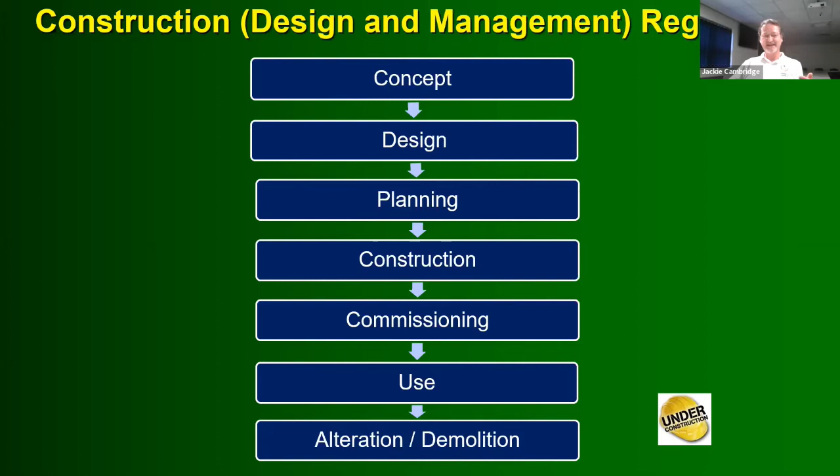There's reasons for why we have it, and I'll come back to that in a moment. Construction design management regulations exist because the construction industry has one of the worst safety records. Over the years, huge strides have been made to make it safer. These regulations talk about health and safety at all these different parts of the project, taking safety into account during the design, the planning, the construction, and the commissioning of the building.

So, just what is construction work? It does cover a wide area - decorating, renovation, and the funny one - demolition. That's the funny thing about construction, we think of it as building. Well, it is normally, but actually within the definition of construction work, it does include dismantling and demolition as well.

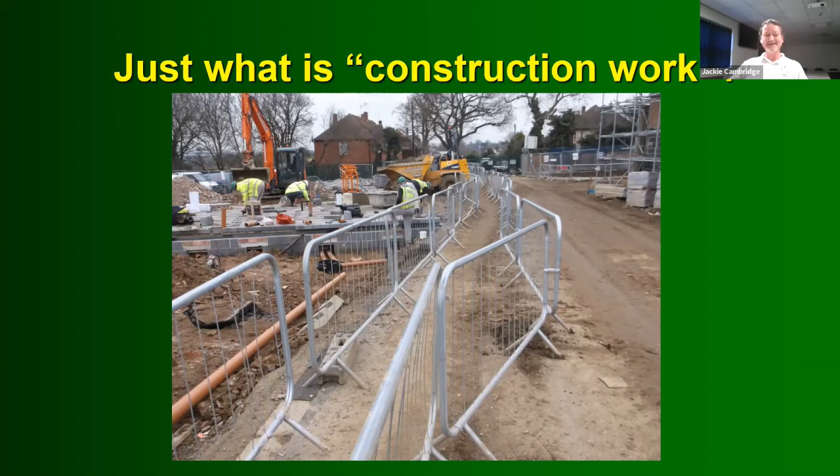This is from the regulations: carrying out of any building, civil engineering or engineering construction work. There's quite a list of what it actually includes. I'm not going to give you the full list, but there's plenty of it.

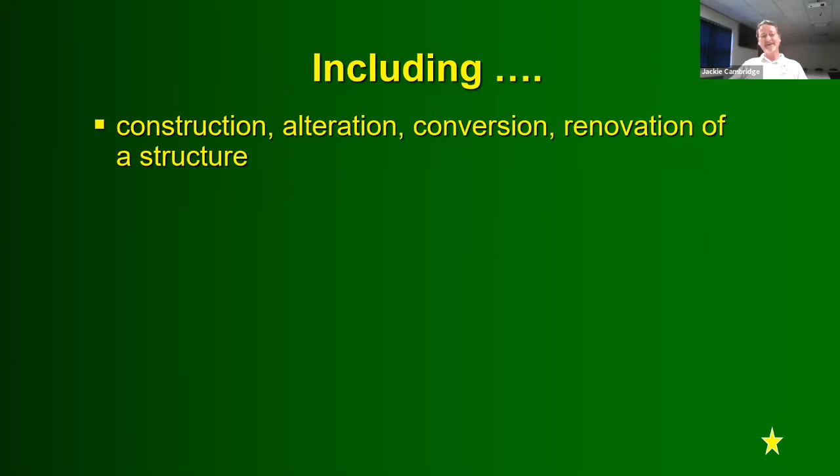So our construction work - building something, construction, altering it, converting something, renovation of a structure. It's about repair, redecoration, maintenance, decommissioning, demolition. It's a wide range. Now, I don't think this one is in your handouts, but it says including cleaning, only where cleaning involves high pressure water or abrasions or toxic or corrosive substances. So, for instance, we're not talking about cleaning as in doing the vacuum cleaning inside your building. We're talking about jet washing the outside of the building, cleaning the brickwork or concrete or whatever construction material the building's made of. So all these things come under this overall definition of construction work.

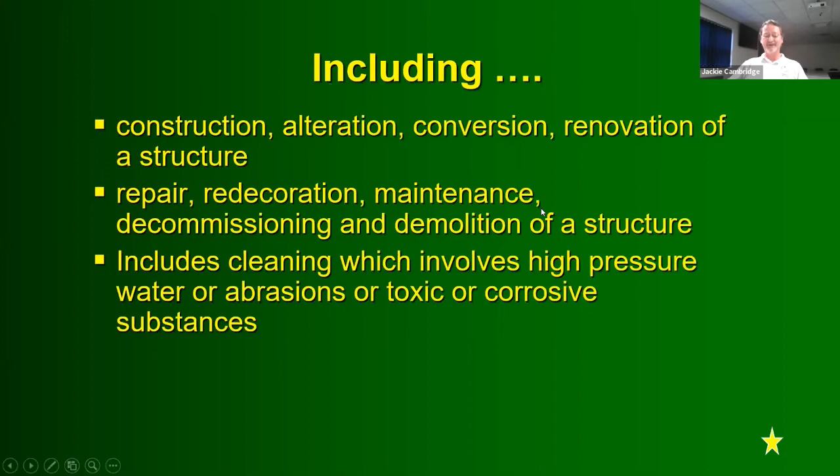There's a lovely site - safety is obviously a high priority there. Not.

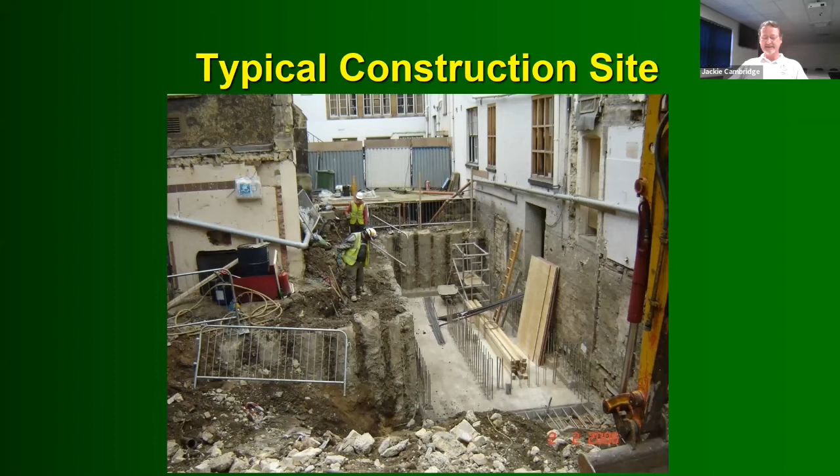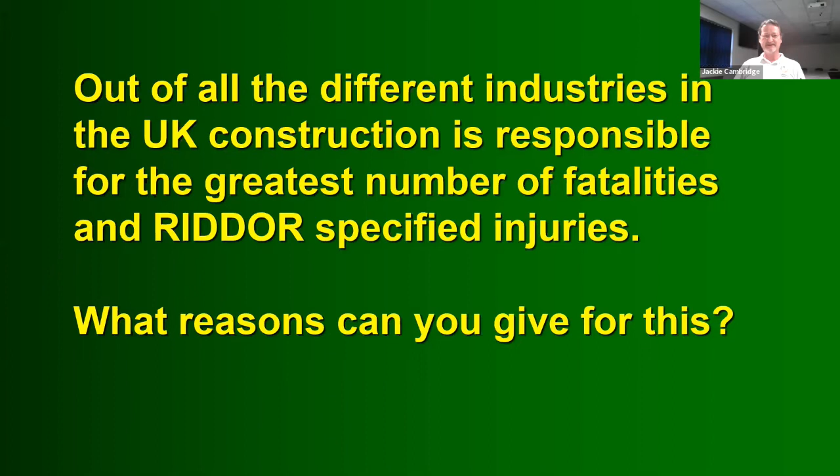Now, I said a while ago, the construction industry has the highest number of fatalities. It's got one of the worst accident rates, and there's reasons for that. So here's a question: of all the different industries in the UK, construction is responsible for the greatest number of fatalities and RIDDOR specified injuries. Remember I said RIDDOR - reporting of injuries, diseases, dangerous occurrences regulations. In RIDDOR, there's a list of specified injuries, and if someone suffers one of those injuries at work, it has to be reported to the Health and Safety Executive.

So the client - this was quite a big change in 2015. It put more emphasis on the client taking more responsibility for the project and staying in control. So the basic duties of the client, and these are all in your handouts: so far as is reasonably practicable, construction work is to be carried out without risks to health and safety. Now, although the client may not be doing the construction work, as part of the management of a project, they've got to make sure that things are being done to keep people safe. So there's a lot of cooperation needed with other parties on this. It's the client's duty to ensure that welfare facilities are provided.

If you're having renovation projects in a multi-storey building, the chances are on every floor there's going to be toilets and welfare facilities. The client can allocate a particular set of toilets on a particular floor for the renovation workers. If you've still got staff working in the building while renovation's going on, which is quite common, you'd say to your own staff not to use those toilets, as they're reserved for the construction people. The client has to ensure they're provided. The principal contractor also has duties regarding this, and I'll come back to that in a while.

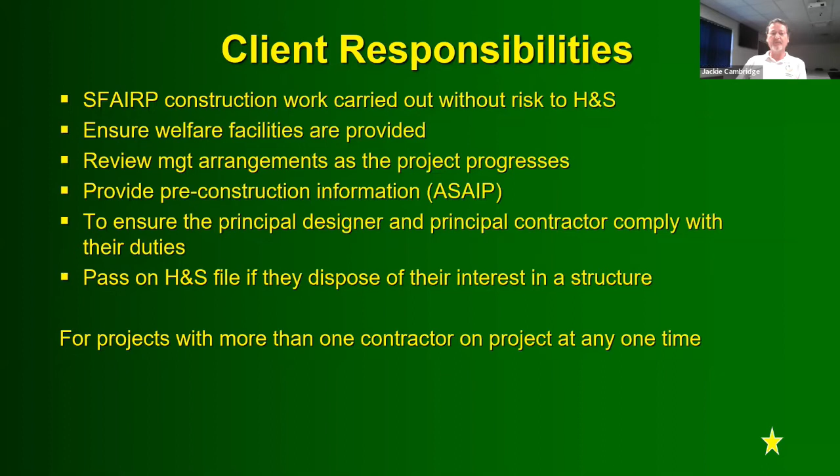If you've got a project with more than one contractor - by more than one contractor, it doesn't mean more than one person. It would mean, say, a group of electricians, a group of tilers, a group of painters. If they're different companies, then they're different contractors. So with more than one contractor, we have to do certain things.

As a client, whether commercial or domestic, we must ensure the work doesn't start until the construction phase plan is in place. The construction phase plan is a health and safety plan for how we're going to carry out the task, taking into account health and safety. So as a client, you're not allowed to let a project start until there's a health and safety plan in place for the construction part.

As I say, the health and safety file - for a big project like a building, it'd get quite a big file. But this is all the client's responsibility to make sure these things are done. Now, certain projects have to be notified to the health and safety executive.

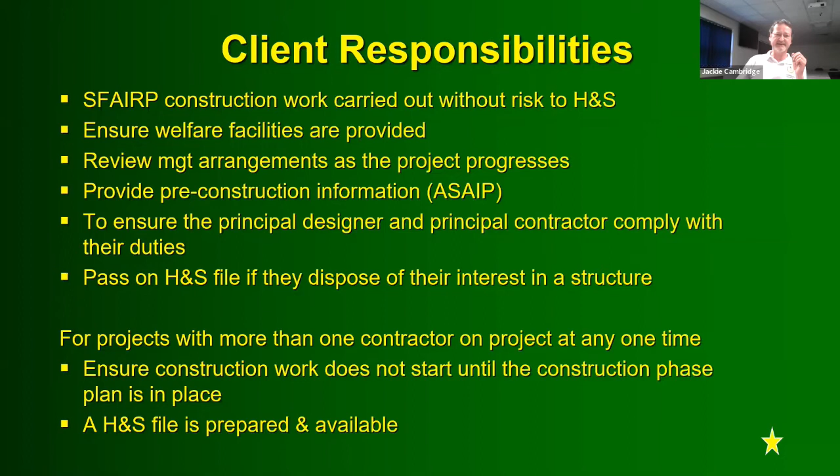We called it an F10, a form number 10. Now, this changed considerably in 2015.

Remember, whether domestic or commercial, any project that's going to go for 30 days or more, and at the same time, at any point over those 30 days, have 20 or more people on site. And even if it's only for 20 minutes, it still counts as 20 or more people on site.

Then we have to let the HSE know about our projects. So they call them notifiable projects.

Any project that's going to last 500 person days, that is, say, 10 people working for 50 days, or if you like, 50 people working for 10 days, so we call those person days. Any project that's going to last 500 person days must be notified to the Health and Safety Executive with a form F10. Mostly nowadays, this is all done online.

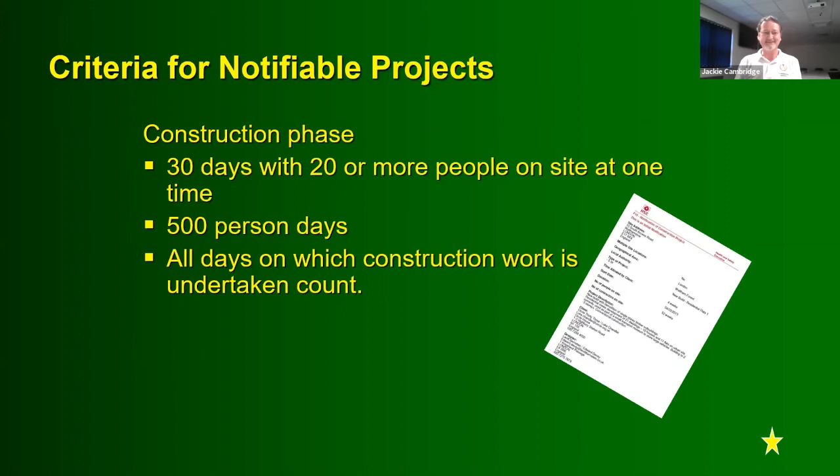But those 30 days includes only the days where work is happening. So if you run your site from Monday to Friday and don't do any work over the weekend, that would be 6 weeks, because Monday to Friday is 5 days. So 5 days times 6 weeks equals 30 days. You don't include the days where there's no construction work.

The F10, in the old days, it was actually paperwork, and you'd fill out the form and then send it off to the HSE or fax it over to them. Nowadays, it's online reporting only.

The only exception to that, and sometimes it does happen, is when you get some of the older construction-related people around, who might just work on their own - they may not have a computer, may not have a printer. Ironically, then they can still do a form, but as long as it's got all the relevant information that's required on the F10, that's the main thing.

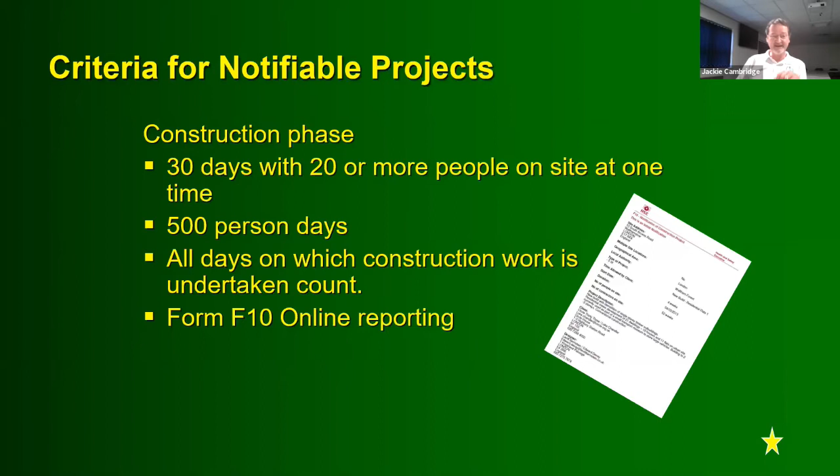Now, this is the big change - again, the client is responsible for doing that reporting. The F10 is one thing, that's the initial notification to the HSE.

It may be you've got a project you didn't think was going to go on for 30 days, but actually it does. So then when we know we're going to go over the 30 days, then we tell the HSE about it, as long as it's got 20 or more people on site.

From the point of view of before we actually appoint a contractor, there was that pre-construction information. This is another duty of the client, usually along with a principal designer if they've appointed one, to put together this information to be sent out.

You've then got the construction phase plan, which is what the principal contractor - that's the company you've appointed to run your construction project, they're in charge of the construction phase - has to put together, a health and safety plan for what we're doing about health and safety during the construction phase.

And at the end of it all, you've got the health and safety file, which ends up, as I say, staying with the building. So it goes to the client at the end, and then it stays at the building. The client is responsible for the F10.

And this is just the starter, just a sample of the paperwork. It's just the very basics - the address, where is this project, and it says there, is it initial notification, or is it an update to existing notification? The address of where the project's going on, and there's various things about who's the client, what's their address, who's the contact name, who's the principal designer - so there's quite a few details involved.

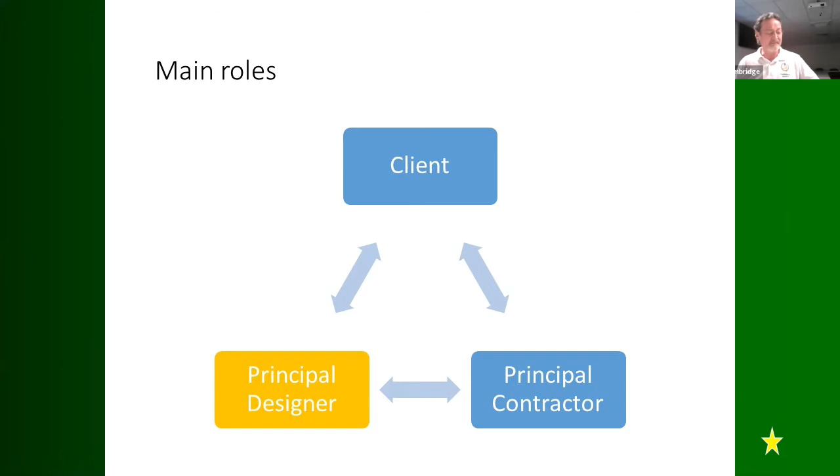The principal designer must have relevant skills, knowledge and experience. This phrase comes out throughout CDM regulations, for whoever's involved in the construction project, so this includes principal designer, designers and contractors as well. Anyone involved in the project must have relevant skills, knowledge and experience.

The principal designer can't just say yes to a project if they haven't got the relevant knowledge. You might have a principal designer who's worked in one type of construction area, like schools or houses, but they may not have worked on a chemical plant or a nuclear power plant. They'd have no knowledge of it, so they can't take on that job. The principal designer is appointed by the client.

Again, it's a common duty throughout CDM regulations to report anything likely to endanger their own safety or that of other people. You'll find throughout these regulations that all the contractors involved have this sort of duty.

The designer must plan, manage and monitor coordination of the pre-construction phase of the project. That is, before we've appointed our principal contractor, the principal designer has the safety responsibility, if you like, in cooperation with the client. So the planning and managing - that's why the principal designer, along with the client, normally puts together the information for the pre-construction information.

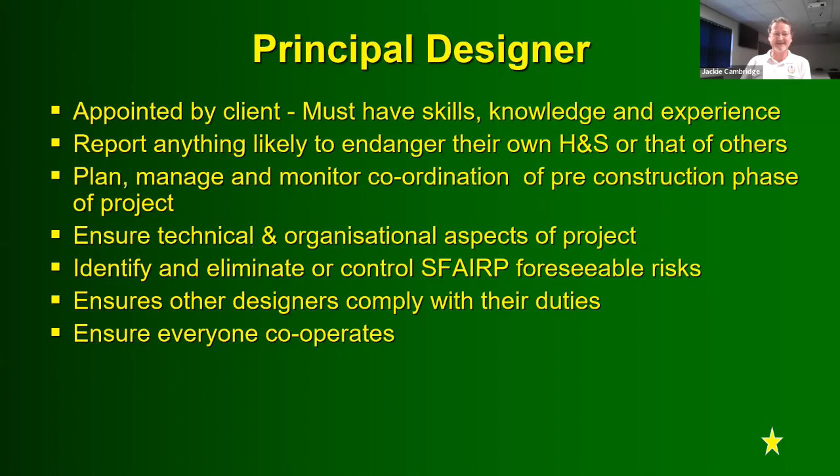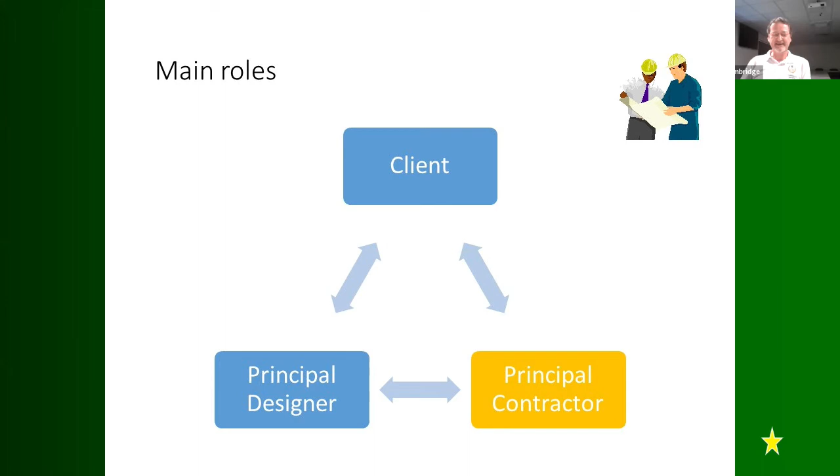So our client decides they want something built. They've got a designer on board to help with that - we're calling them the principal designer. They send out information to various construction companies asking if they'd like to put in a bid for this project. Eventually those bids come in, you look at who you want to use, and then you appoint the company you want to build your project. That's going to be the principal contractor.

And so the principal contractor - once we start building, the principal contractor is now in charge of safety, the overall responsibility, for the construction phase. As we said a while ago, the client has a duty to make sure there's a construction phase plan in place before building starts, but it's the principal contractor that actually prepares the construction phase plan.

Again, like I said before, cooperation, coordination of tasks and of contractors. From the building stage onwards, it's the principal contractor in charge of all this, making sure of cooperation. One of the problems we said earlier was multiple skills, multiple trades going on at the same time. I mentioned blocking off the staircase when having hot works going on above, which should never have happened. That was a lack of cooperation, a lack of coordination of tasks. That was some years ago, before this legislation came out, I'll just say.

So the idea is the principal contractor will have a plan of what work's been done each day, taking safety into account. It's making sure everyone cooperates and coordinates. They're in charge of all the other contractors on site.

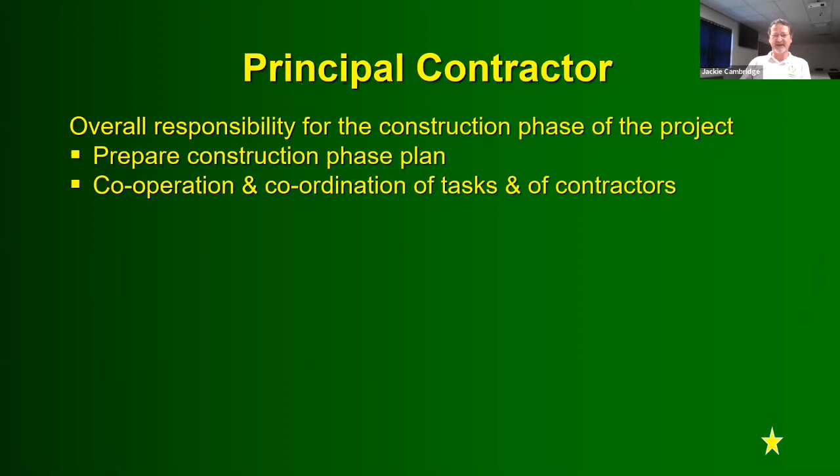Checking work is carried out without risk to health and safety. Supervision - the definition of supervision is overseeing. So the textbook definition is overseeing the work, overseeing what people are doing. Now in reality, a lot of people have the title supervisor, but quite often they're so busy doing what it is they've got to do in their job, they don't have the chance or time to properly supervise and oversee what their fellow staff are doing.

So a non-working supervisor can walk miles a day around sites, checking that people are following the safety rules which are set by the principal contractor. It's a great title to have, I must say, non-working supervisor. So that's one way of checking the work is carried out without risk to health and safety.

Now in construction, one of the issues we said about death rates - enough workers die on construction sites, but also over the years quite a few members of the public have died as well. Sometimes a construction site is like a playground for children, and that's unfortunately where some accidents have happened, where they've climbed up on scaffolding or fallen down into trenches etc. Quite a few accidents over the years, quite a few deaths as well to members of the public on sites.

So the principal contractor, before the building work starts, the first thing they've got to do is secure the site. That's their legal duty under CDM regulations - securing the site.

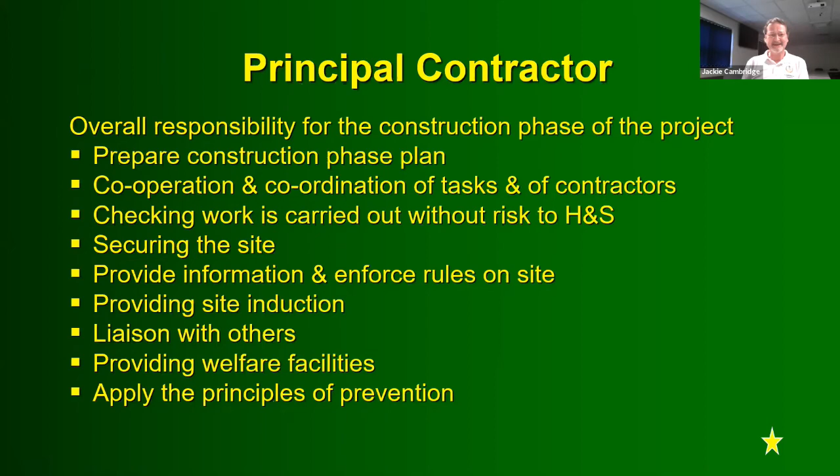The contractor must apply the principles of prevention. And it's basically that thing about eliminating risk where we can, making things safe. We can't eliminate, we reduce the risk, etc.

The pre-construction information - this is before we've appointed our contractor, our construction company. There's certain information we might want to send out to these companies to let them know what all this is about, what our project is. Would they like to put in a bid to build our project?

Often this is done before we've got a principal contractor, because the contractors need that information in order to decide if they want to take on your project.

So, for instance, you ask someone to build a nuclear power plant - good luck on that one, I'm using an extreme case here. You're not going to get some two-man band, Fred Smith and his brother or whatever, to come and do that for you.

You've got to send out relevant information to construction companies so they can look at it and say, we've got no experience of that, therefore we're not going to bid for it. There's only so many companies that can do those sort of projects - to build it, the principal contractor who knows about it, who's got experience in such things. So all this pre-construction information is any information we can send out to the construction companies so they can work out if they can take on the project or not.

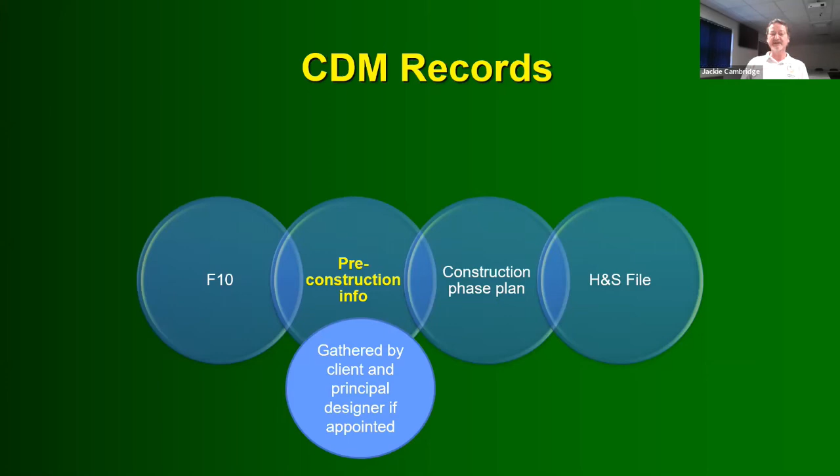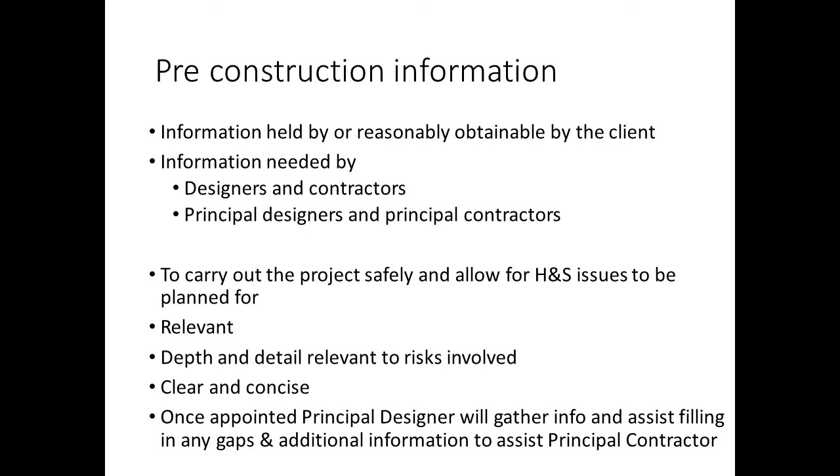So there's all sorts of information that might be included, some very basic stuff and some a bit more detailed - limits of what can be done on that site, there might be environmental issues to take into account. So anything we can tell the contractors about, we let them know what we can.

It's got to be nice, clear and concise information - what it is we want done, where is it, when by, and anything else about the nature of the job that we can let them know in advance so they can decide. What's the purpose of our plant, what is our factory, what do we do - whether it's a flour mill, a food factory, or a chemical plant. So it's all the details we can put in as much as possible.

Okay, so we've done the F10, we've got the pre-construction information, and then we get the construction phase plan.

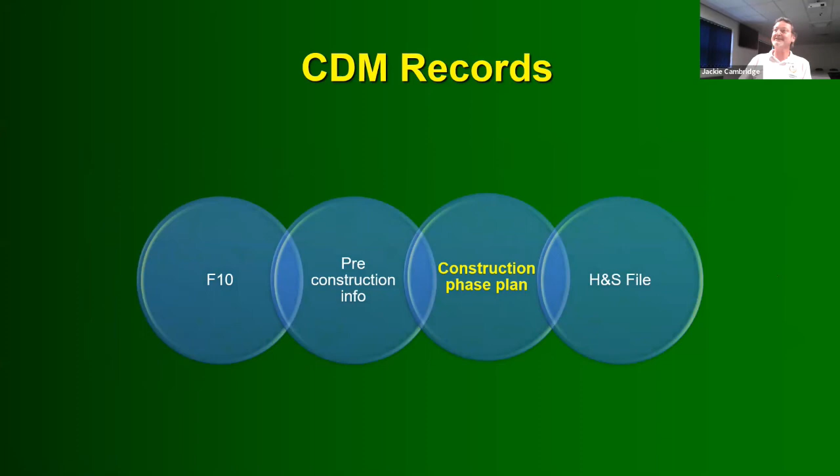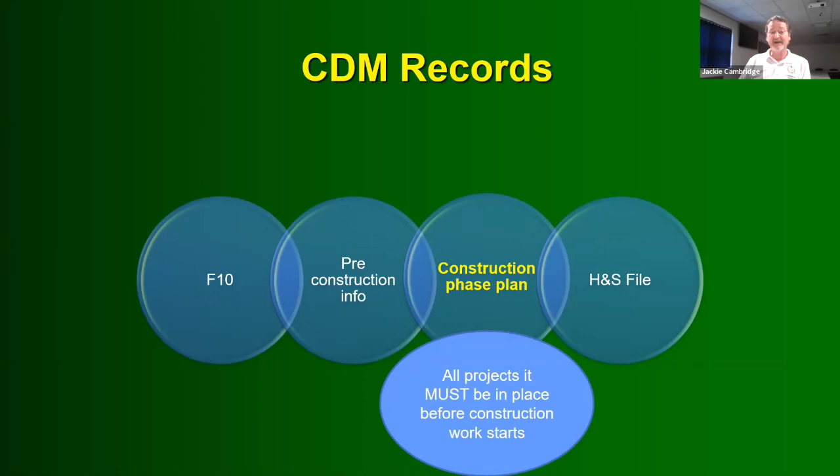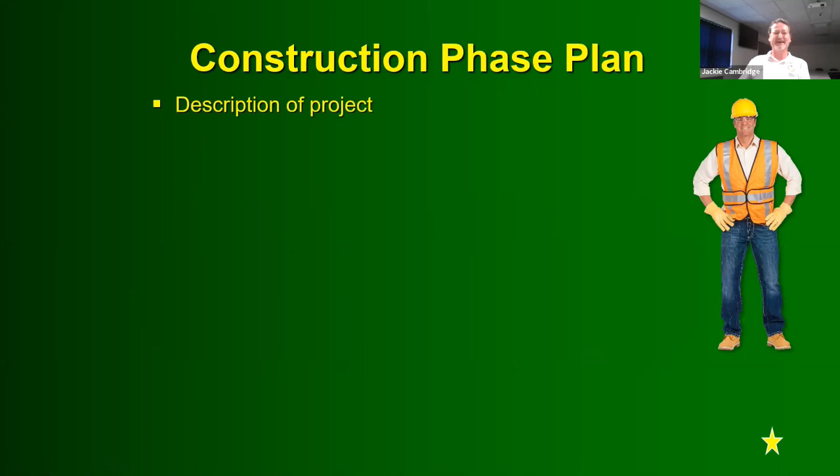So the construction phase plan includes quite a few things. For a start, a description - what is it that's being done, what is our project? You get to think about the team members, that may be the names of the various contractors involved, including principal designer, designers, whoever's involved in the project, could be your supervisors, etc.

Remember, it's all health and safety related, so the aims and issues - our aim is to complete this project without anybody getting hurt. Things we may need to take into account, like chemicals on site, vehicles and plant, fuel storage - a lot of sites will have diesel tanks for the vehicles being used on site. So you've got all sorts of things taken into account.

So the health and safety aims and issues - what are the issues? It involves work at height, work below ground, confined spaces. We're talking about trenches, very deep trenches, and the risk from things like methane, various gases coming up from the ground.

The rules in this construction site plan or phase plan - it will have the rules, safety rules that everyone has to abide by. And those rules, this is part of the principal contractor's responsibility, will be displayed around the site as well, and backed up with supervision and good management.

In the plan itself, this plan's got to be in place before we actually start building anything - we're planning for safety in advance. So we're going to say, right, this is how we're going to cooperate with each other. We're going to have weekly meetings, monthly meetings, depending on the nature of the project - regular meetings, and in that phase plan say who we expect to attend, not necessarily the names of individuals, but a representative of the client, a representative of the principal designers, representative of other designers, the various groups involved, the various representatives and contractors working on site.

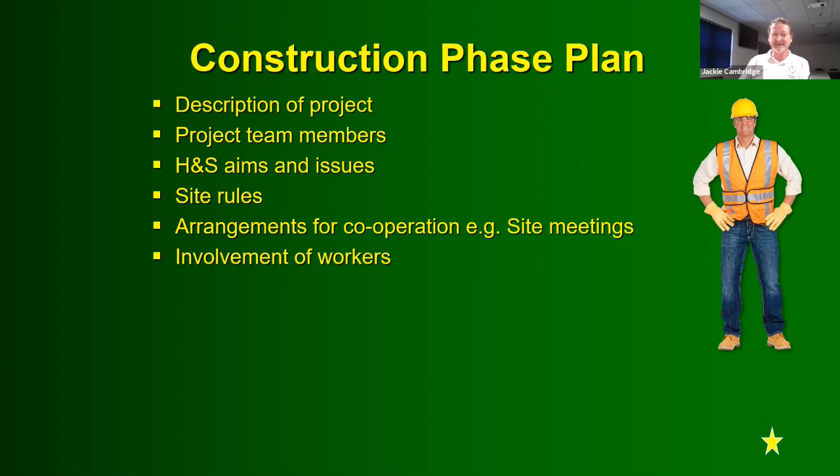In that phase plan, it would say about the site induction. A site like Cambridge is quite a big site, going on for a few years now. You've got an overall security level, and within the first security barrier you then get three separate projects going on, all quite big, run by different principal contractors.

So in the construction phase plan, it says about site induction. First you go to the site induction for the overall security. Then once you're into your part of the site where you're visiting, you've got to do their site induction too. So it's about how that's all controlled - we've got to plan for that in advance.

And then your site-specific risks will be in the plan - how we're going to control work at height, how we're going to control hot works, work in confined spaces, the movement of vehicles. There's all sorts of things. The construction phase plan can be a large document - again, the bigger the project, the bigger the document.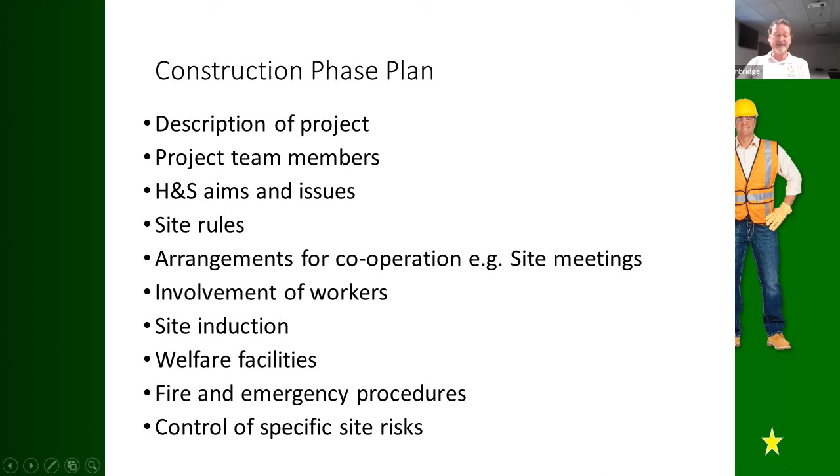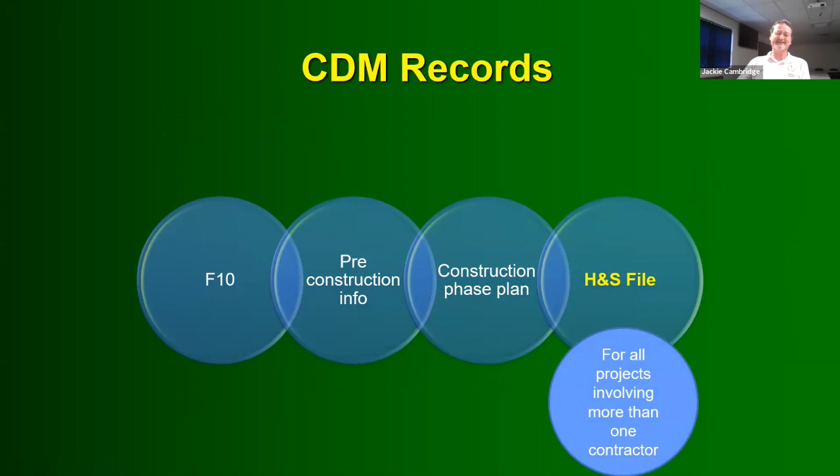And then we've got the safety file. As I said to you earlier, this is the one that stays with the building. Everybody involved, all the contractors involved, will give their relevant information. It usually goes to the principal designer, who puts together a book, and then at the end of the day it all goes back to the client.

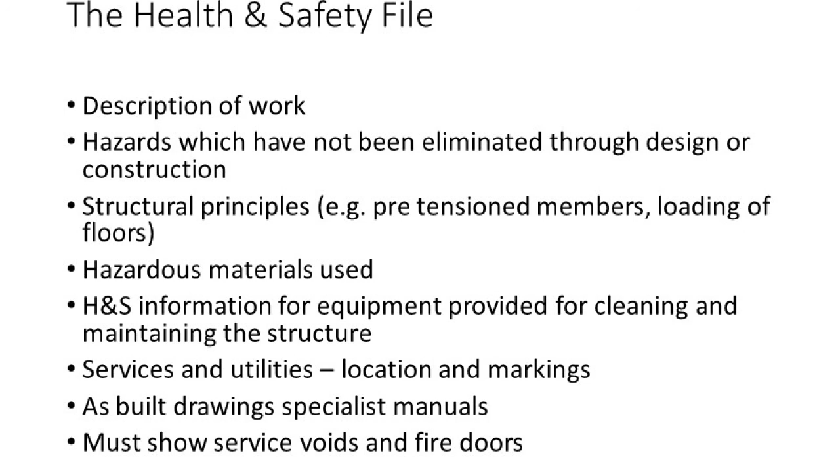We've looked at selection of contractors, the sort of information we'd ask from contractors to make sure we get the right contractor for the job. Because remember, if it does go wrong and there's a major accident which is possibly reportable to the HSE, their questioning will be: okay, why did you select that contractor? So controlling contractors is one thing, but selecting the right contractor is something in the first place.

Monitoring contractors - a way of monitoring is just to go and talk to them every now and again. You may get a contractor in to do some work within your company. One thing is the contractor might have given you brilliant paperwork, a great safety policy, wonderful risk assessments and method statements, or RAMs - it all looks great. And then you find when they're on site, you have a little look and see what's going on and find the standards are appalling. There might be trailing cables everywhere, there may be damaged equipment, there may be unsafe practices, maybe there's no PPE. There's all sorts of possibilities.

So we have a responsibility as a client to make sure that we keep an eye on our contractors. That doesn't mean standing there looking at them all the time - we just pop in every now and again to make sure they're okay. So that's part of what we've done today.

With CDM, the notifiable projects are the ones that are going to involve 30 or more days plus at the same time 20 or more people on site at any time in that period, or the ones that go on for 500 person days - you notify the HSE.